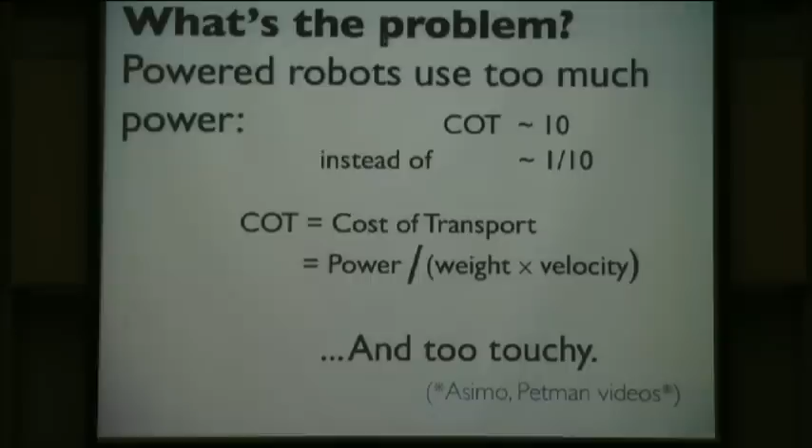And then the issue is that robots, as a rule, are too touchy. And the main measure of that is what I call the Atkeson index. Chris is not here today. But the Atkeson index: we had a long discussion at a robot meeting about how do you measure the stability of a robot. And people had all kinds of ideas about eigenvalues and this and that. And Chris Atkeson raised his hand and said, I know what it is. He said, look at the demonstration of the robot.

Look at where the person who made the robot is. Look at where the robot is. Measure the distance between the two of them. If that's small, the robot is not very stable. If that's big, and I think that's really a better measure than anybody else has cooked up. I think of it as like comfortableness or reliability.

If we take this group of people and we all walk out after this talk, you're not nervous about anybody. You're not thinking, oh, I hope nobody falls down on the way out of this room. But if this was a room full of robots today, you would be standing far away, not because you trust them, but because you're afraid of them.

So the famous robots to compare against are Petman or Atlas from Boston Dynamics. And here's a video from the web. I don't know how to hijack videos from YouTube, so I got to show you this from the web video. And you can't complain a lot about this robot, except that it's not doing too well on the Atkeson index because of that red cable there.

It's got a big safety line, which probably has been there since Ben Brown was working on these robots 30 years ago, right? So it's rare that they're... now Big Dog is taken off tether and is doing pretty well.

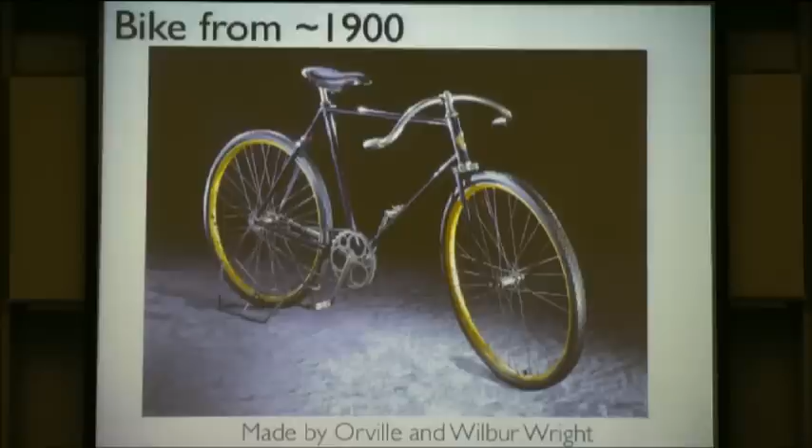It was part of bike design pretty consistently starting in the 1890s. For example, here's a bicycle built around 1900 by the famous bicycle designers Orville and Wilbur Wright. Everybody knows who they are, right? Famous bicycle designers. And here's a motorcycle, which looks very much like a modern motorcycle from the same era, by an equally famous motorcycle designer named Glenn Curtiss, who's known for buying out the Wright brothers, making Curtiss-Wright Aircraft, which was the biggest airplane company in the World War II era.

So I was foreshadowing the airplanes which are coming up. The airplane makers obviously were interested in bicycles first, like any person interested in dynamics should start with bicycles. So people can ride a bicycle, but bicycles can ride themselves.

There's an interesting side question about bicycles. Yes, please. Back in the 1800s when they were doing those equations for bikes, they were much different—it was Orville and Wilbur's new bicycle that gave rise to the modern bikes. So could you push one of those big-wheeled bikes and have the same stability?

I don't know about the big-wheeled bikes. But if you go back in time before the big-wheeled bikes, they looked like the newer ones. So they went from these two equal wheels up to that funny design and then back to two equal wheels again. When they had two equal wheels, there's some indication people had a sense they could balance themselves, at least that they could ride no-hands. The big-wheeled ones, the penny farthings, I don't know about. The big wheel was about getting bigger gears without gears, so it's just the big wheels—the evolution of the big wheel is just trying to go faster with a given size crank.

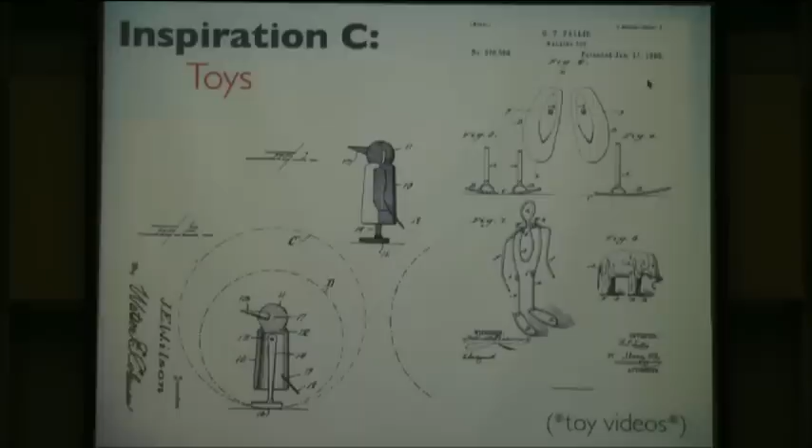And these are little walking toys which walk on their own. Let me show you how that looks. Here's the wire walker—this is a reconstruction of it that was made in Delft. I have a few of these wire walkers, and no one in my lab has actually gotten one to walk, which is an important message, but somebody in Delft was patient enough to get it to walk.

Actually, the first one I got was mailed to me from someone in Romania who made it for me, and the postwoman came to me in my box and delivered this thing, and she said, I hope this isn't anything delicate. She delivered me this cardboard box which was squished flat. Bend it all back together again.

That's walking down a slope, yes—or it's walking on level ground with thrusters acting at the center of mass of each of the links. Special gravity thrusters. And here's the penguin walker.

This is one that you can buy on eBay. Lots of people had this toy in the 40s and 50s. It's not the kind of toy that could be popular now because it's a little too fussy, which is important also.

But Tom McMahon had this as a kid, and it inspired him to think that maybe walking is something like this. He and a student, Simon Mochon, did a pendulum calculation, and their model of human walking was a stance leg, a thigh, and a calf—they looked at this triple pendulum. They wrote Lagrange equations, calculated the motion of the triple pendulum, and saw that in the swing phase, the motion of the links of a triple pendulum was like what people did when they were walking.

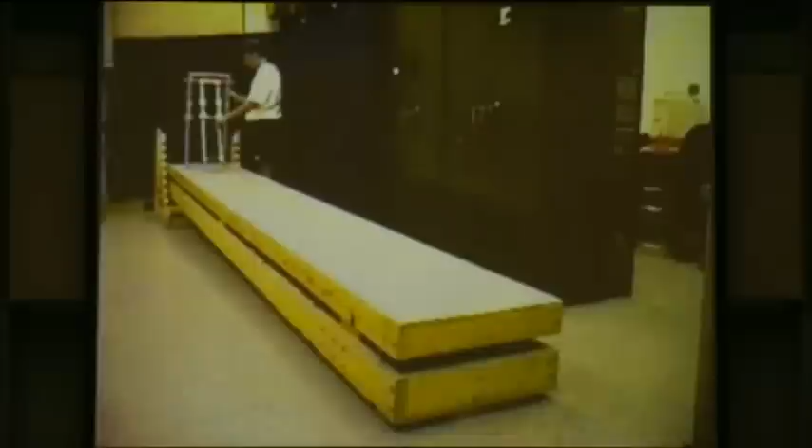So let me show you some videos of passive dynamic things. First is a Cornell copy of McGeer's walker. The design of this robot is straight from McGeer—we changed some details, but they're only engineering details, like the sizes of bearings and things like that.

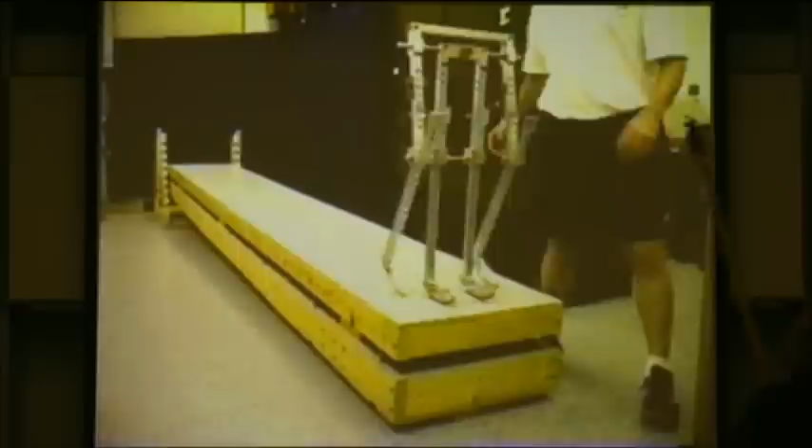This is sticks and hinges walking downhill. This end of the ramp is lower than that end, so it's walking down a slope of a few degrees. It's just gravity pushing down and slightly forwards on the center of mass of each part relative to the level ramp. This thing has a life in simulation too—sticks and hinges solving the pendulum equations and the collision equations and so on. In McGeer's world, when he first did this, it had a life in simulation first, and then after he got the simulation to work, he built the thing.

There's a video I'm not showing, of McGeer, the first time a device of this type worked—Tad McGeer goes and giggles. It works. The calculation was right.

Yes? So would you agree that the slope is equivalent to the cost of transport? Yeah, so the slope here—whether it's the sine of the slope or the tangent of the slope, it's small enough that it doesn't matter which you pick—is the cost of transport. This is very small, like 0.05, so about 4 or 5 degrees.

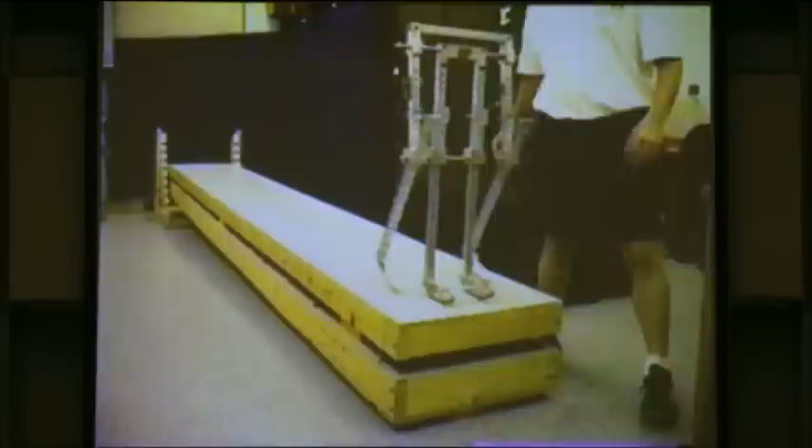We built a few of these at Cornell. Then we went on and tried to do more fancy things. So the next one is trying to make it look three-dimensional.

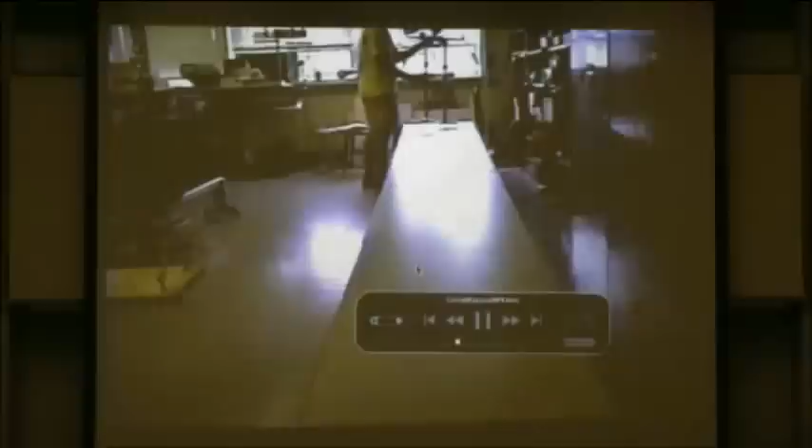This is Steve Collins making this robot go. Here's the first version. And this morning Steve told a story about this first version—I never saw this first version work. It walked twice, and one of the two times was on that videotape. And I never saw it.

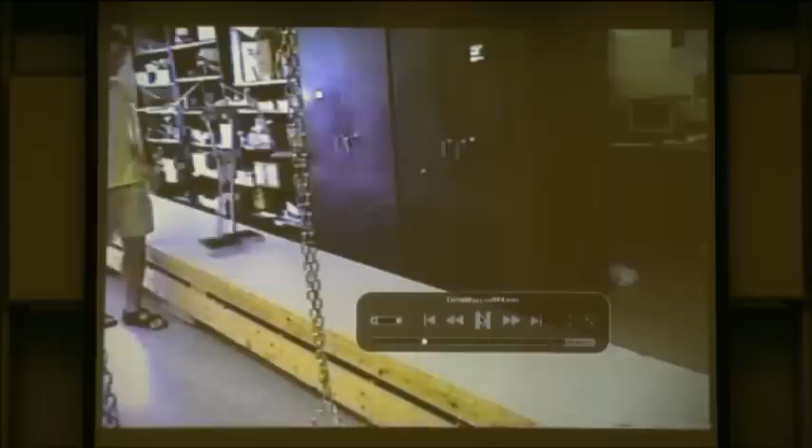So Steve came to the lab as an undergraduate—this is Steve here in the front row, mechanical engineering at Carnegie Mellon—and added arms to this and got it to work, reliably in a way. If you watch this video, Steve very cockily keeps the videotape running while he picks up the robot and moves it to the top of the ramp again, to say: see, it can work twice in a row, sometimes.

Now, if it works one time out of five, he only has to try those double takes 25 times to get a 50% chance of getting it to work. But so it was reliable in the sense that lab demos were functional sometimes when Steve was there to give them.

Right now, this robot is in the lab, and no one can get it to work. But in terms of the subject of passive dynamics, I'd say this robot is kind of the pinnacle—it's the most lifelike, complicated robot. And I'd say, until the most recent videos of Petman and Atlas, it's perhaps the most lifelike walking of any powered or unpowered robot. At least I look at it and see it that way.

But now, just for the first time in the past year or two, there are powered robots that can compete with this in terms of looking natural. So any questions about this robot? Yes? Is there something about the shape of the foot?

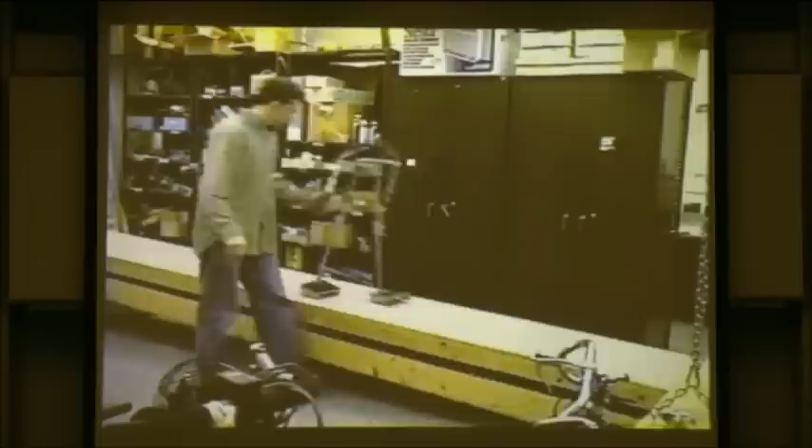It looked like it was rocking, but then when you get a close look, it looks like it's staying in contact. Is there something cute about that? Well, there's stuff that we thought was really cute, but I'd say the depth of our understanding is marginal.

We had thought we want to take a two-dimensional concept and lift it into 3 dimensions. We don't want it spinning around, steering and yawing, so we'd like to have some extended contact. When each foot is on the ground, there are 2 points of contact. So the feet are moving from right to left, and the center of mass is going in an S-shaped curve. If we take a given shape of curve of the center of mass, we can calculate a center of pressure position, and we try to put that between the 2 rails so both rails will stay in contact.

On the other hand, assuming they are in contact, the shape of the rails determines what that S-shaped curve is. Steve and I went back and forth doing pencil and paper calculations and estimations trying to make that all just right. But when you look at the video, you see it rides up on one rail or the other, and it didn't work anyway.

So probably the main thing that makes this work, compared to the unreliable previous version, is that it's got these counter-swinging arms, so there's not a lot of twisting going on. Our intention was to have these 2 rails with careful curves that made the center of mass go back and forth just right, so there'd be 2 points of contact at all times, and it wouldn't twist, but I don't think we achieved that. Does that address your question?

What? Say it again, Steve? It's a ZMP controller without a computer.

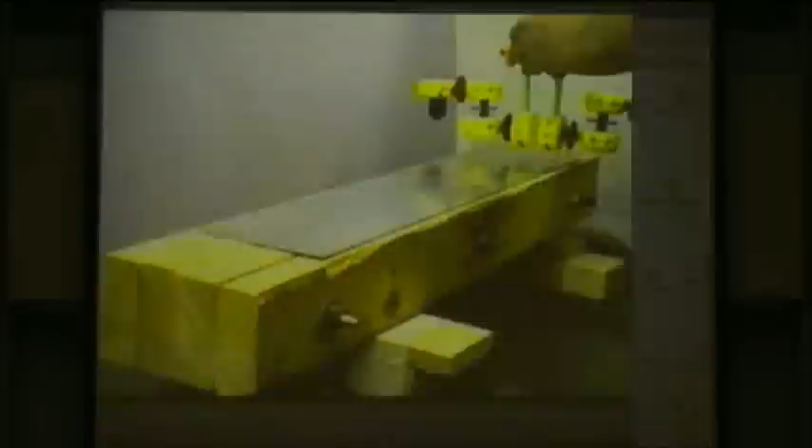Exactly. So then I say academically, the most interesting robot we've made is this one. And this is big science. It'll cost you about $20 to reproduce this, but you can make 4 of them for $20 — you have to buy the whole kit. It's made of Tinker Toys.

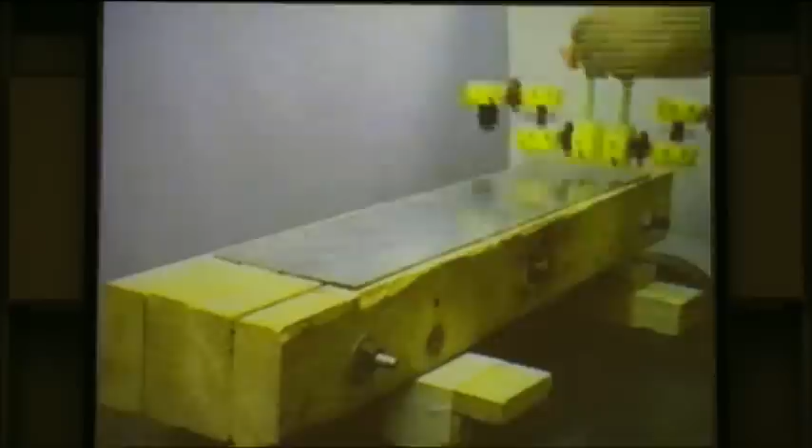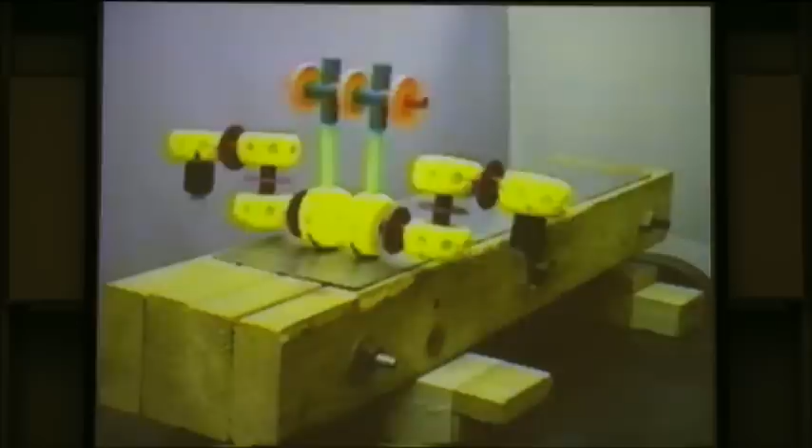So inspired by bicycles explicitly this time, I thought, hey, bicycles can balance themselves when they're moving, but not when they're stationary. Can we test this passive dynamic walking robot idea and see whether we can make a passive dynamic robot that can balance itself only when it's moving? And you say, well, robots are different than bicycles because robots don't have fast spinning parts. That's true, but at that time, we knew...

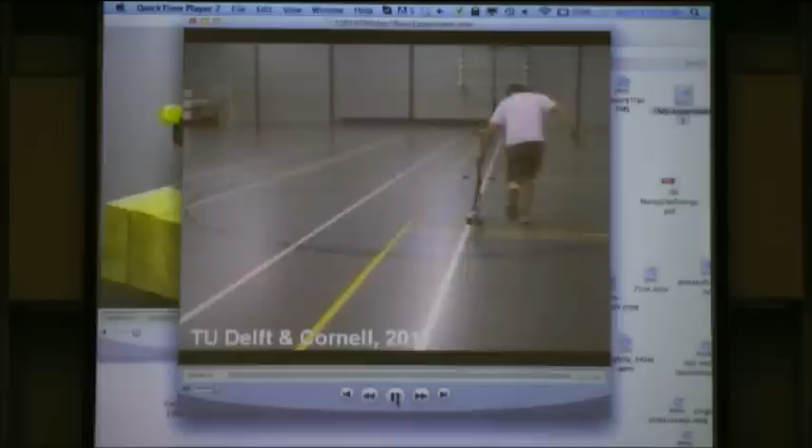...that you can make a bicycle that doesn't have fast spinning parts. For example, this one has no gyroscopic effect and can balance itself also. It has effectively ice skates for wheels, with counter-spinning front and back wheels, so there's no angular momentum. Now, at this time, this machine hadn't been built, but we knew conceptually it was possible to make such a bicycle. So bicycles, even without spinning parts, can balance themselves.

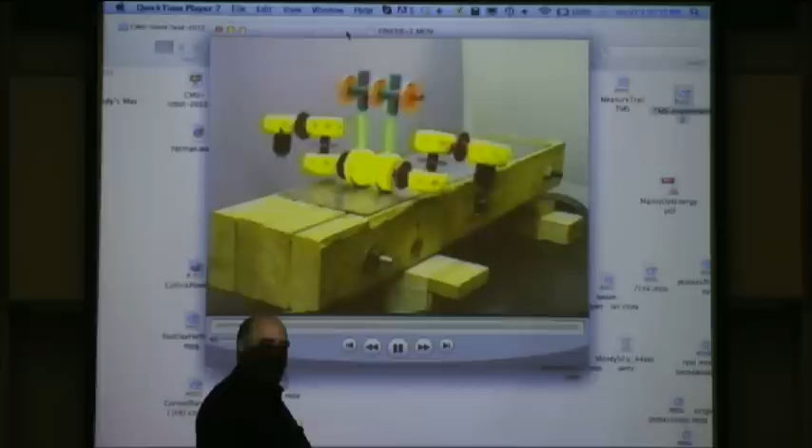Is it possible to make a robot without spinning parts that can balance itself? Well, obviously, we've done that, and toys did that back in 1888. Can we make one that cannot stand up? Well, then there's technicalities about what you mean by not standing up. The McGeer robot with the inner and outer legs could stand up like this, but the feet were small enough in curvature so it could not stand up like this.

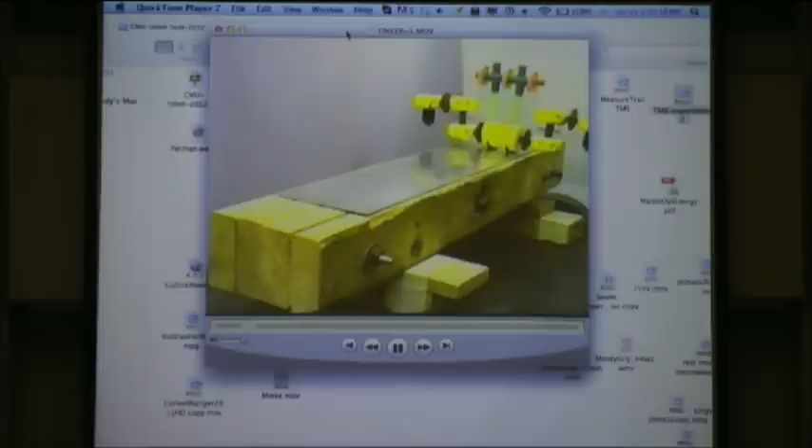So the challenge I gave to my student, Mike Coleman, was can you make one that can't stand up in any configuration, even when the legs are splayed. And so this one, even when the legs are splayed, you can draw a line looking down the contact line, and there's a center of curvature which is below the center of mass in this case. So this can't stand up any which way.

And just for graduate students thinking about their careers, Mike worked on this for about 3 years in simulation. The smallest eigenvalue you can get — there's math in here — was 1.15. Now in this world of Poincare maps, instead of continuous differential equations, you want eigenvalues inside a unit circle, less than 1 in magnitude, and he could only get it a little bigger than 1. So we decided that his PhD thesis was that it seems impossible to find a passive dynamic walker that can't stand up.

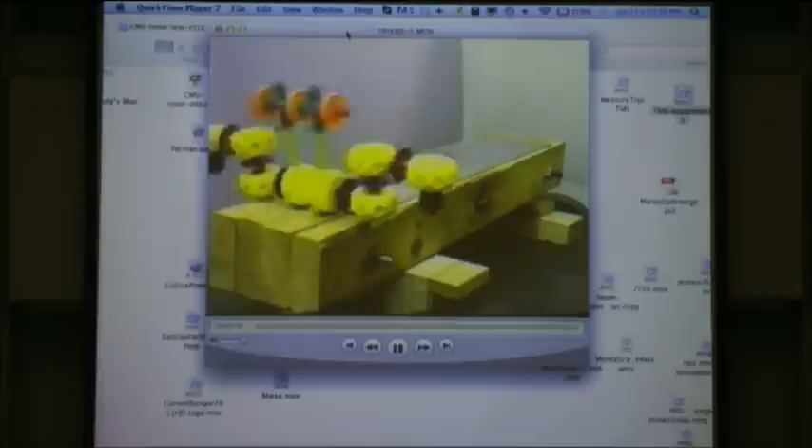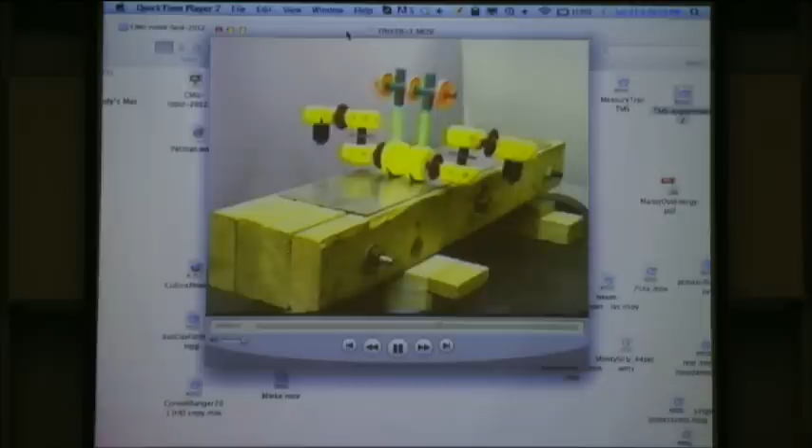And a few days before his thesis defense, he decided to build a little Tinker Toy model. The purpose of his model was to show the mass distribution that all his optimization showed should almost work, with an eigenvalue of 1.15. And then he did this thing, which I don't know why he thought to do, but it's just meant to be a conceptual model. He tried it, and then it did walk.

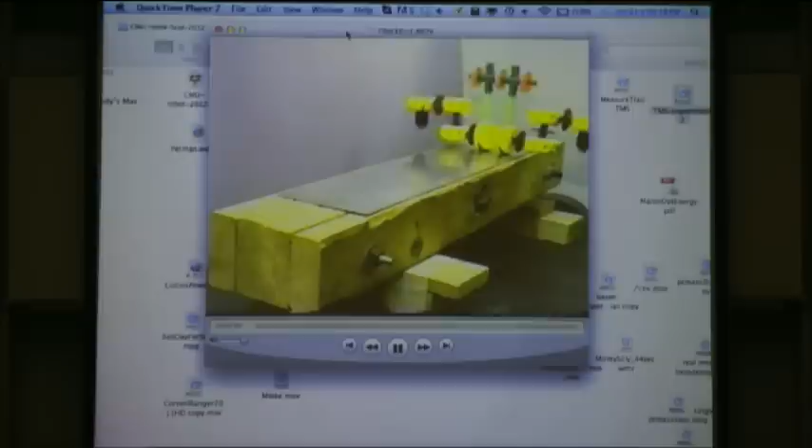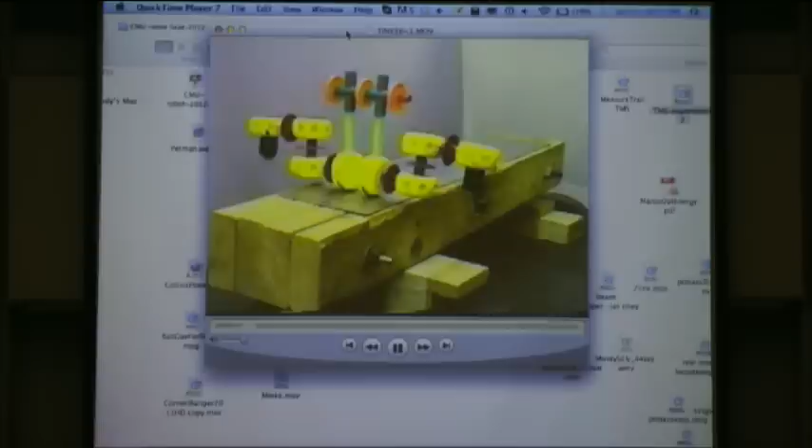And then it took 2 more years for the computer to agree that it could walk. So it's a little bit fussy — in fact, it's extremely fussy. It's very unreliable, like the other robots are. Very, very reliable on videotape. Just walks again and again.

So Steve said, I want to power a robot. Lots of students in my lab wanted to add power to robots. And I said, we're the passive dynamics lab, everybody else is powering robots, we've got to find out what you can do with passive dynamics. And he said, I really want to do it. I thought, well, you got that other robot to work, so I sort of gave him permission against my better judgment. He tried to do the Wright brothers thing of taking that two-legged robot and adding a little bit of power to get it to walk.

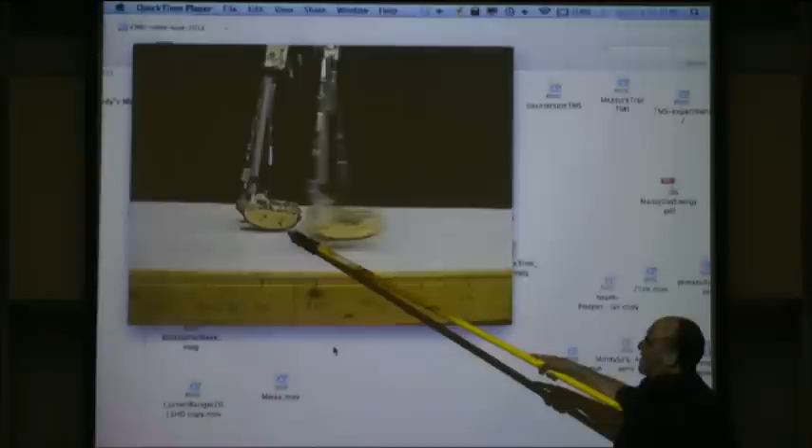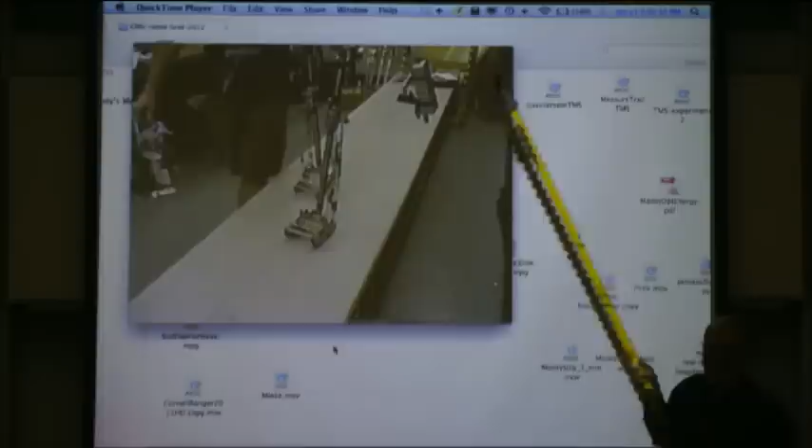This is Steve with that robot. Now the ramp is not sloped downhill, it's on level ground. This is conceptually the same machine, only it's got a little bit of power. What that means is it's got a little electrical switch here, like a 50-cent switch. It's half falling off because the electrical tape is falling off, it's sticking on this. When the switch gets triggered, it lets a little thing release, which releases a spring, which does a little ankle extension. So there's something like 60 lines of code running on a teeny microprocessor that acts approximately like a few relays and timers. One foot hits, the other one triggers, and a motor winds up, gets ready for the next one, using a mechanism that we basically copied from Ben Brown.

Everybody's here, right? The mechanism inside this, I've told you this before, right? It's sort of copied from the bow-leg hopper mechanism of winding up and then triggering and releasing.

So this is typical videos of this robot walking. What I mean to say, this is all of the videos of this robot walking. We have hours of video of this robot falling. Steve was meticulous about videotaping himself when this thing was falling down. And maybe this isn't exactly typical, but really how this robot works is like this.

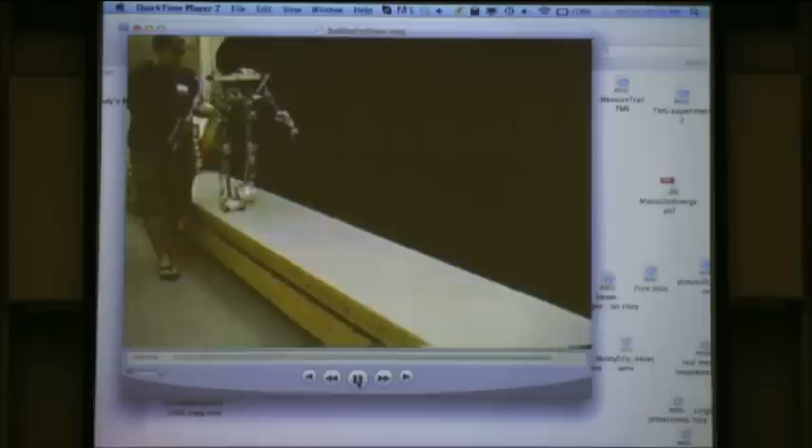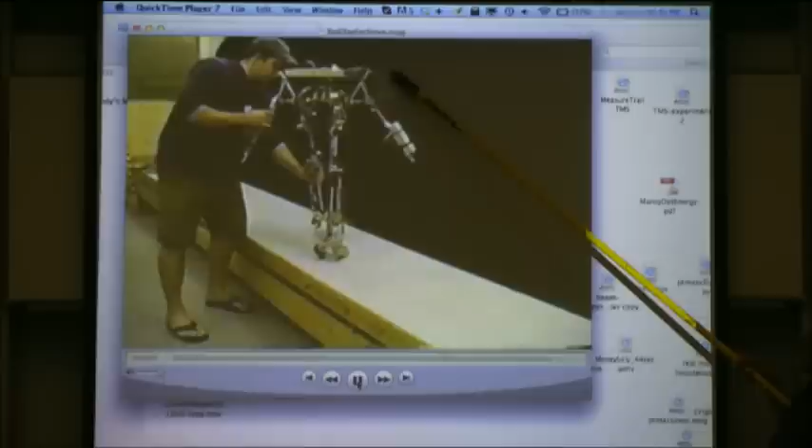So this is Steve. At this point, he's a first-year graduate student in Michigan who came back to Cornell for the summer to work on this. So you watch this video, you want to look at this point right up here, this is where the action is. Got to slip the sheet here a little bit. There's smoke coming out of the processor.

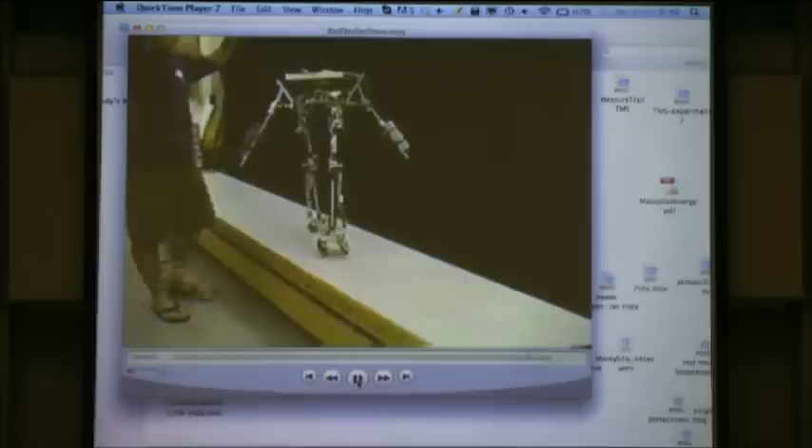So that's something like a month, right? Disappeared just like that. But we have, I don't know, something like 100 videos of the robot falling down, usually not so badly. That's the nature of this thing, which I will explain a little bit more, what I think the messages are.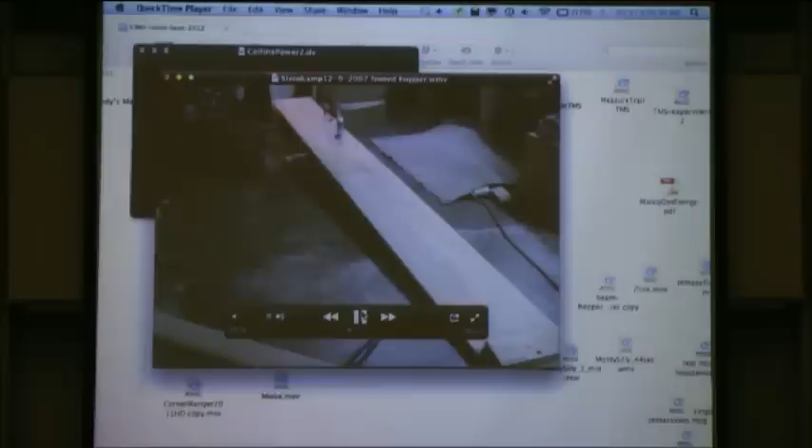Just to show you a fun video, I gave another guy a challenge, no thanks, of making a hopping robot that could not stand up. He's an optical equipment designer, and he took the challenge and worked on it and made this hopping robot that can go down this ramp without falling down. This is a beautiful machine. This guy's name is Peter Steinkamp, and if you go on the net, he invented a bunch of little hopping robots.

This is a slow motion video of this one. So this cannot stand up, and it can hop the length of a ramp. It can do 100 hops in a row, that many times in a row. It can hop 100 times down a 16-foot ramp. And the computer thinks it can't.

So this is still in the stage that Tinker Toy was in. As far as the computer says, the smallest we can get the eigenvalues is like 1.02. So the theory we have seems to trap this thing away from being actually dynamically stable. Yet it can do, in practice, 100 hops.

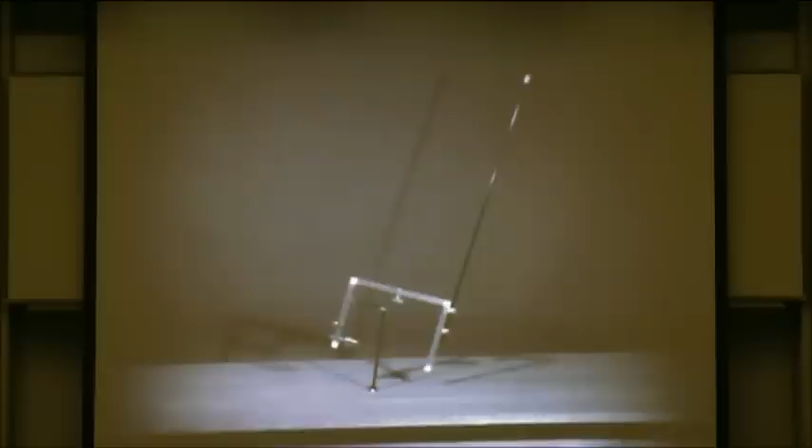And our way of reconciling that is that we think the actual physical robot is marginally unstable, probably, and that people have learned to launch it very well close to the periodic fixed point, and that there are little tricks that give you feedback when you launch it to help you find that fixed point. Because we match so much about the motion in simulation. For example, it has a period 11 oscillation, period 11, and we catch that in our simulation as well as in the robot.

Now, Peter Steinkamp is a guy who sees passive dynamic robots wherever he goes. So he was unpacking a refrigerator one time, and he thought to himself, maybe this piece of packing foam is a passive dynamic robot. And it was.

Somewhere, no, this is a disaster I've never had before, but I think my power cord is in my last talk. Oh, no, here it is. No, I got it. I got it. Well, somebody help me find an outlet just so I'm not distracted by this. Right in the front here. There in the front. That black. Okay.

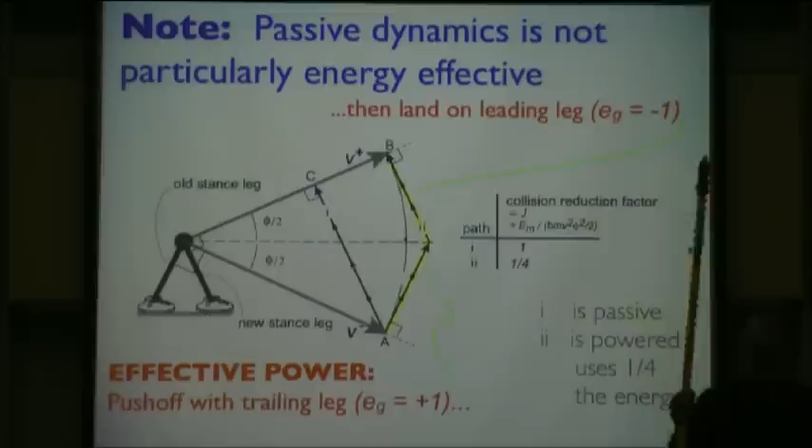If instead, just before the collision, you push off with this foot, you can move up to this state, and then you have a collision like this. And that collision can be 4 times smaller in energy loss. And the measure of how much energy loss you have is how far you move from this constant energy surface. And this line here is about 4 times smaller than this line here. The deviation goes approximately quadratically with the angle because a circle is about a parabola. And if you have half the angle, you have a quarter of the energy loss.

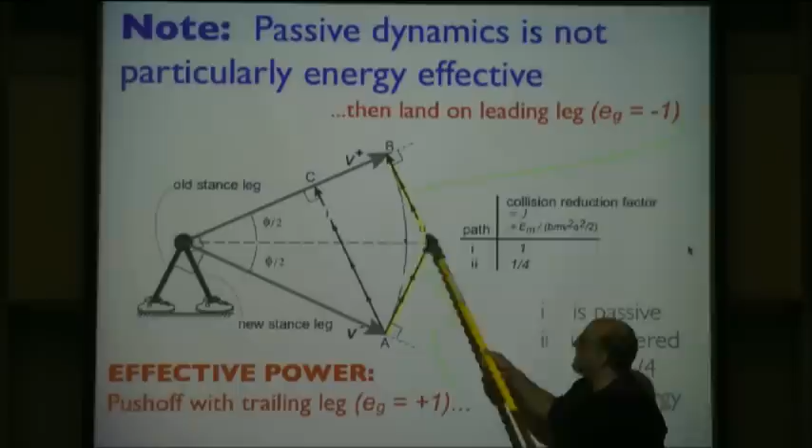So that means passive dynamics, compared to what we can do ideally, is a factor of 4 less efficient. It's not just a little less efficient, it's a factor of 4. So saying, oh, passive dynamics is a gold standard for efficiency or energy effectiveness is not correct.

Okay, so what's the idea? Is put power and control all over the place. I think maybe following the biological analog. But I think we want to keep some of our philosophy, which is you want to keep things manageable. So you want to take passive dynamics and morph it into the world of power. And you say, how can you morph it into the world of power? Because passive dynamics is no power. You want to keep the idea of doing something in some simple and primitive way and put it into a place where you have lots of power and lots of sensors.

So our test bed for this whole concept is now a stupid and boring robot, basically, because you'll see a video of it. But maybe I'll just jump to the video and show you what I mean by a stupid and boring robot.

Pranav, are you here? Sorry. No, I think maybe he agrees.

So here is this robot that we made, which is sort of our answer to passive dynamics, or the first step in our trying to get beyond passive dynamics. This is trying to make a powered machine that is comfortable like people walking. So here's people walking, not afraid of them falling down. And the question is, can you be comfortable with a robot walking the same way? And this robot in this situation we were pretty comfortable with.

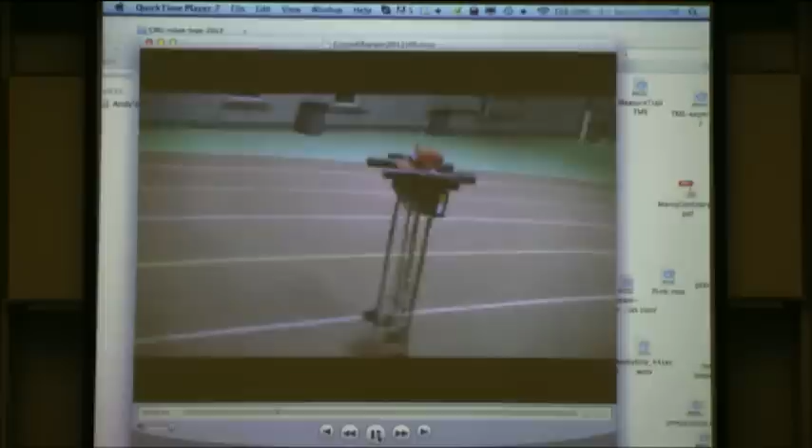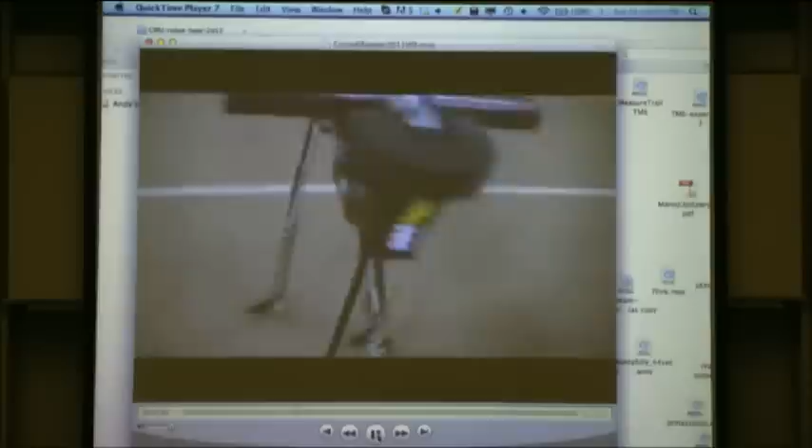And instead of having two 1-bit sensors, on-off switches on the feet, which the Collins robot has, this has about 25 more or less analog sensors, 8 or 10 or 12 bits. The information flow here is about 100,000 times bigger than the one on the Collins robot. The computation is about 100,000 times more per second, like the number of lines of code executed per second.

It's boring. It doesn't have knees. It doesn't even look three-dimensional. But this thing walked 65 kilometers without being touched or recharged, which is by far, I believe, and no one has challenged this, the record for walking robots. So it's 40 miles. That's twice what the Boston Dynamics people are advertising they're going to be able to do. That's on a single charge? Single charge, 40 miles. Nobody touched it for even 1 second.

It's autonomous in that all of the walking control is on board. The lack of autonomy is this model airplane, $70 model airplane radio control for the steering. The motors on it are hip motor and 2 ankle motors. Outer ankles are one motor, inner ankles are one motor, and a steering motor which twists the inner legs when the inner legs are in contact with the ground for steering.

This thing lives also in simulation, as opposed to the Collins robot, which didn't. And we have a pretty faithful simulation, which I forgot to queue up. But you can see the robot walking next to computer graphics of the robot. They walk at the same frequency, step length, and so on.

Yes? How much power storage is there? It's about 500 watt hours. So I think it's 5 or 6 batteries that are about a pound each, and each pound is about 100 watt hours. So it's 5 cents worth of electricity to go for 30 hours of walking. In this incarnation, it was 16 watts or something like that.

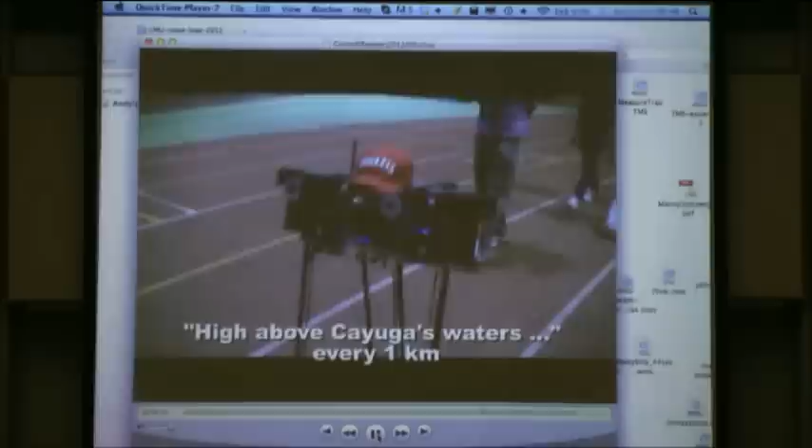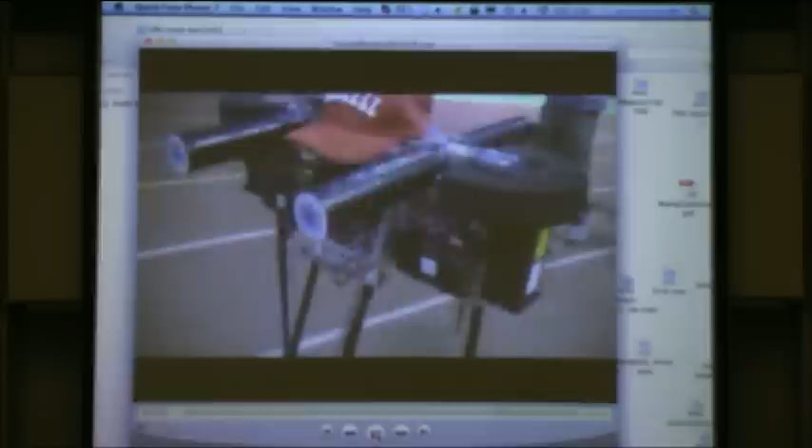What was the cost of transport? The cost of transport in this walk was 0.28, and Steve's robot was 0.2. And then after this walk, Pranav did some optimization in the control and got the cost of transport down to about 0.19, which might be a little bit less than Steve's robot.

So it's 30 hours of us sitting around like this, right? I don't know if this is fun to watch or not fun to watch, but here it's about to stop. It stops in a sort of graceful way. There, it stopped. Okay.

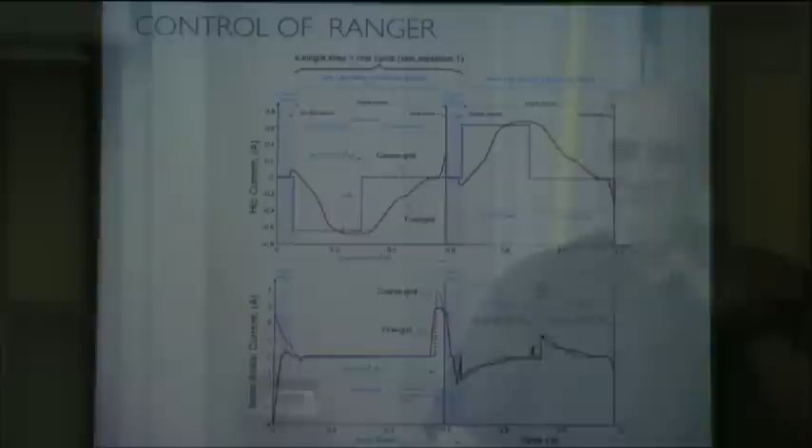Without getting into the details, the red curve is what we got from computer optimization. The blue curve is what we did when we ran the robot, which is this idea of keeping it simple. So we have sort of a control algorithm which combines optimization of performance with an informal optimization of complexity. Here's what we got out of it.

Okay, so now just morals towards the end of the talk. Why were we seduced by passive dynamics? Passive robots were stable, sort of. And I think in a way, we would have been ahead in our robot research if passive dynamic robots were not stable. Right? In terms of when we design this powered robot and make it work, we don't even pay attention to whether it's stable or not passively.

We start with the controlled machine and understand how the controlled machine works with control. So it's not like this idea, you have to understand the plant first before you add the motors and controls. The plant here includes the motors and controls, and we try to understand that, and we don't even think about the passive dynamic stability. It's not in the brain anywhere.

So, sorry. Then there's the problem that the passive dynamic robots walk a lot like people do. And again, that's some kind of coincidence that passive dynamic motions are close to energy optimal motions. And you say, well, of course they are, but I say, of course they're not, because I know this example that is off by a factor of 4.

But nonetheless, it's true that an energy optimal solution will have the motors mostly off a lot of the time. And a passive dynamic solution has the motors off all of the time. So they look a lot the same a lot of the time. When you do use the motors, though, it makes a difference exactly when and how you use them.